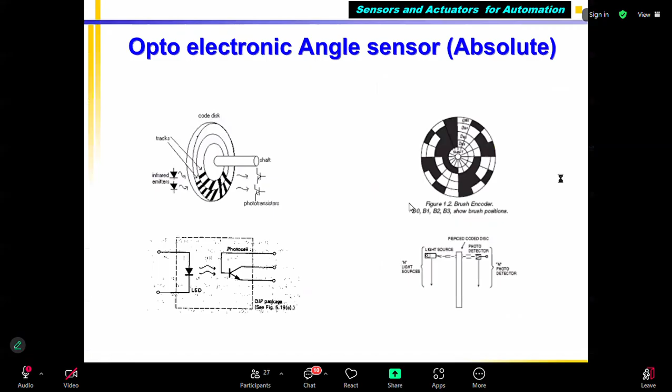Sir, I'm sorry for interrupting before the match. Sir, there was an image of optoelectronic sensor. Can you just go there? Sir, I was of the opinion that for wheel speed sensors, we use optoelectric sensors, because that's what my peers or mentors had told me in company. But we also discussed other kinds of sensors in the class, right? Like capacitive rotational sensors or something.

Inductive, I told, inductive. Yeah, inductive. So among them, which is better, sir? Optoelectric or inductive? See, optoelectric is better, but only thing is dust problem. Today you listen to it, then you'll understand.

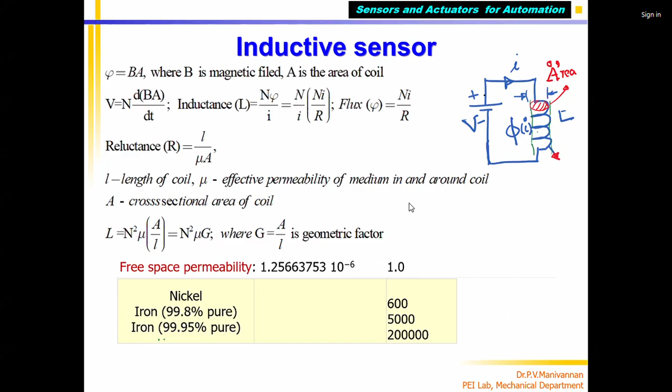So today we'll go to some more important sensor parameters in graphical form. Already we talked about sensors, correct? We started with input range, output range, sensitivity. We have talked about sensitivity, then resolution.

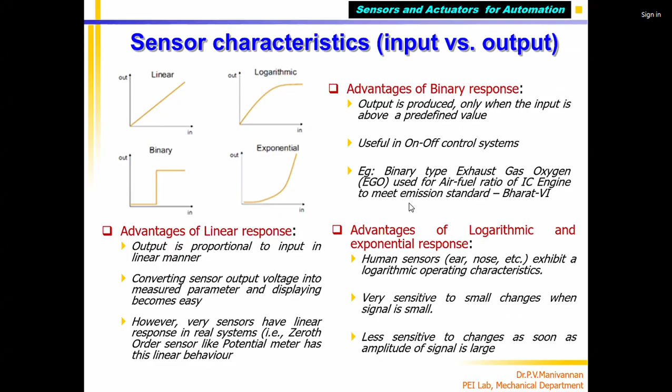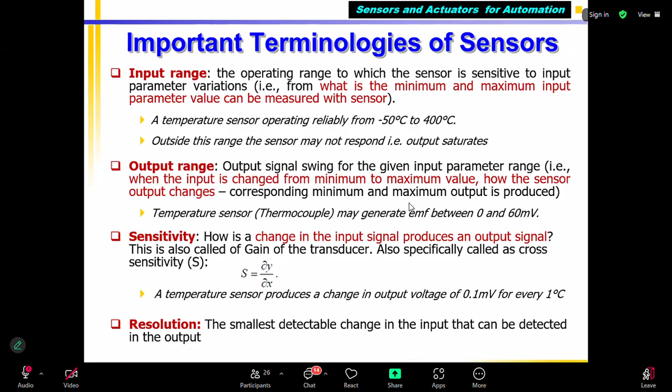So resolution, precision and hysteresis, all these things I am showing in a graphical form to understand better. So if sensor is linear, input-output characteristics: you can see the x-axis input varies from 0 to some value. Maybe pressure, temperature, force, whatever the input parameter. The sensor produces an output, generally in the order of millivolts. Most sensors produce a voltage. Few sensors produce a charge, like the piezoelectric sensor we are going to see.

Few sensors produce current also, in the order of milliamps, 0 to 10 milliamps, 0 to 20 milliamps. But many sensors produce electrical voltage in terms of 0 to 100 millivolts, 0 to 50 millivolts, or 0 to 1000 microvolts. If the input varies from 0 to some maximum value, output also starts from 0 to the output maximum value. As I change the input, the appropriate output comes. Connecting those, I get a straight line with a slope, a linear sensor, that is best.

But sometimes I told you there can be an offset. We talked about a sensor with offset. Normally it is supposed to be like this red line, a normal sensor when the sensor is new. But if you have overloaded your sensor or it is aging, even when input is 0, you can see that there is some output.

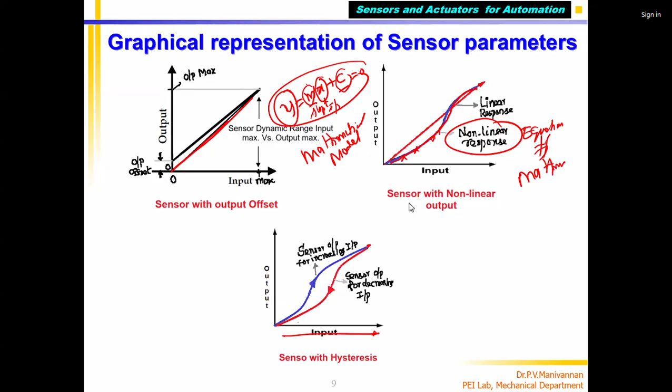Further, what do you need? This mathematical equation of the sensor. It can be a straight line equation, a spline equation, a semicircle equation, or different ones. That is called the mathematical model. And the sensor model can be a simple algebraic equation. So I said y equals mx plus c. If the equation of your sensor has only addition, subtraction, multiplication, division, then that equation is called an algebraic equation.

Sometimes you may get an equation something like dy by dt equal to dx by dt plus kx(t), something is there, correct? x is the input, y is the output, and k is the constant, and x of t is the input, correct? So what is this equation? This is a first order equation, first order differential equation.

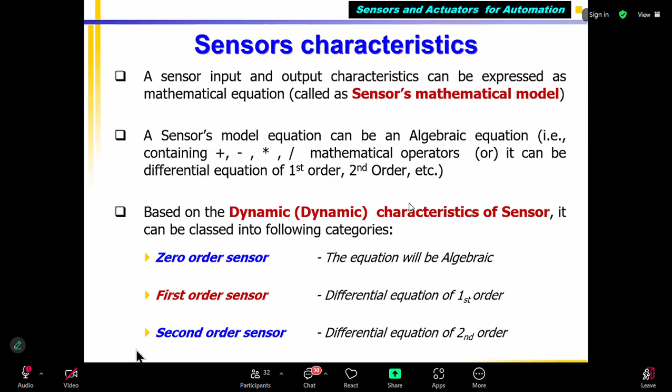Sometimes you may have d square x(t) divided by dt square plus dx by dt plus kx(t) equal to 0. You may get an equation. So this equation is called second order differential equation. So if you model your sensor, you may get a simple algebraic equation, or it can be first order, second order, third order, like that. The equation can be like that.

Already we saw modeling RLC circuit, correct? We had a spring mass damper system. We saw hydraulic actuators. Modeling already saw. So same way, sensor also will get a differential equation or algebraic equation. If the equation what you are getting is y equal to mx plus c, this is algebraic equation. If the equation has only algebraic terms, multiplication, addition, subtraction, that sensor is called zeroth order sensor, correct?

You apply input. What you did? You applied input 0 to V in, that is maximum input, and you noted what is the output, 0 to maximum. You connected the data points, correct? This is called calibration. This calibration curve is y equal to mx plus c, a straight line. Then that sensor is considered zeroth order sensor. It is algebraic equation. Then sensor is called zeroth order sensor.

Okay. Then instead of that, same thing you did, you are getting a differential equation. dx by dt plus kx(t) equal to f of t input. Sorry, output. This is output of sensor y of t, and then x of t is the input. Then if the equation is first order differential, that sensor is called first order sensor. Similarly, if you get a second order, d square x(t) divided by dt square plus dx by dt plus kx plus something is 0, then it is called a second order sensor.

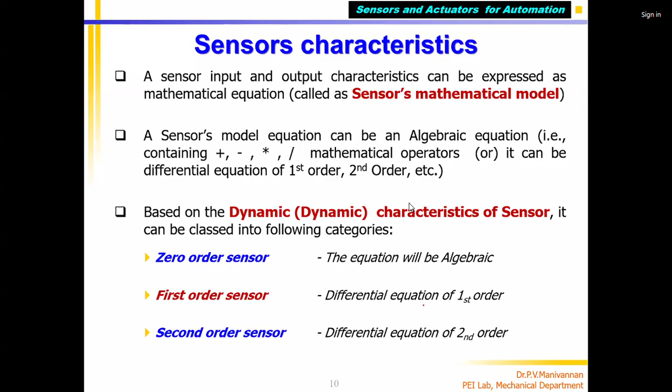Sir, it's a first order. Resistance. Is strain gauge a first order sensor? Zeroth order? Yeah. Why? Because it is like a spring. Yeah. Input output relation is only algebraic equation. Right? Yes, transfer function relation. Transfer function is a simple algebraic equation, so it is called zeroth order sensor. Okay. So the first order sensor will have a first order differential equation. Now we'll see the example.

Zeroth order sensor example, for example, potentiometer. TPS sensor is nothing but a potentiometer. It has 3 terminals. You can see 1 terminal, 2 terminal, 3 terminal. So the last 2 terminals are called fixed terminals. Definitely you would have seen the potentiometer in your lab or radio, TV. So it will look like this. This is a shaft. If I rotate this shaft, correct? This is body. Inside that you have a circuit, what you call a track, something like this.

You have a non-conducting backing on which they put ground carbon particles. Ground carbon particles, they make as a paste. The paste will be coated on the semicircular face like this. Okay, and one end is this, I say terminal 1. The other one is terminal 2. The center one I call 3. And I have one moving contact touching this carbon paste. Now this is 1, this is 2, this is 3, the moving contact. Between the ends I connect a voltage, for example, 10 volts.

Okay, here I am applying 10 volts. So between the last 2 ends, 10 volts is there. Now we know that this is what we call a ground. I will take a multimeter, correct? Our voltmeter is connected like this, and the other end is connected to the moving contact. Okay, when the moving contact is here, it will show 0 volts.

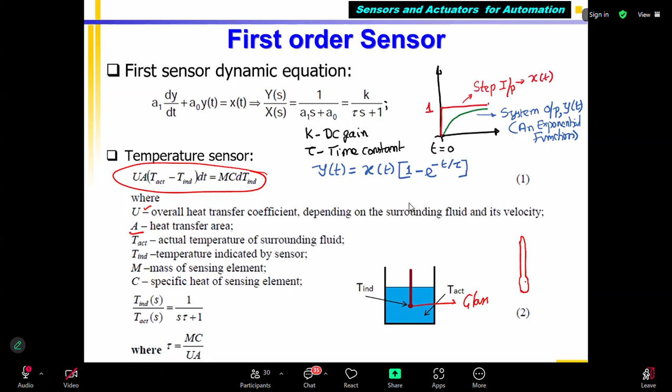The thermometer bulb: generally a mercury thermometer will be something like this, correct? Here will be the mercury. But for understanding purposes, we made it like a bulb like this, filled with mercury. Correct? Spherical.

So in that case, the surface area of this sphere is the heat transfer area, through which only heat is going inside the mercury. Mercury is receiving heat from water or wherever, whatever temperature you want to measure. Then T indicated is the temperature indicated by the thermometer. T actual is the water temperature indicated.

M is called the mass of the sensing element. What is mass here? Mercury mass. Maybe a few grams, 1 gram, 2 grams, 3 grams will be the mercury inside the thermometer. That mass. C is the specific heat of the sensing element. Again, the mercury. Correct. Once you know that, then you can find out.

So I can write the transfer function of this system, which is nothing but T indicated by T actual. Output divided by input is called the transfer function. G of S is nothing but 1 divided by S tau plus 1, where tau equals this. This is called a time constant. Tau is called the time constant of the thermometer. Please note that again, the time constant depends upon M, C, U, and A.

All are the sensor, the thermometer, parameters. M is the mass of the mercury. C is the specific heat of the mercury. Right? U is the heat transfer coefficient of the glass bulb, the thermometer bulb. Then A is the area of this one. So finally, the time constant depends upon this material.

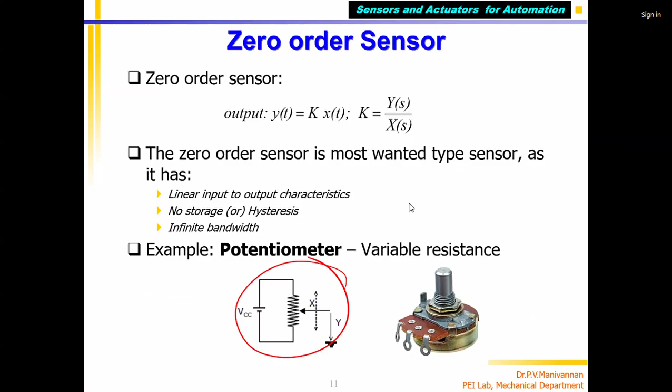Yes. For which sensor? This sensor has 0 time constant because there's no storage element. A zeroth order sensor, which has an energy dissipating element, will have a time constant equal to 0. Okay. A first order sensor has storage. That's why you are getting a differential equation. Okay. Note down this equation. This is an example of a first order sensor.

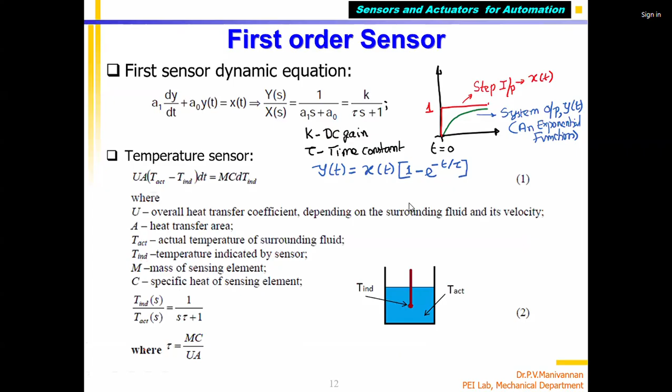KD as the damping constant of the damper, but in the majority of books we use the C or B convention. You can use anything. Nobody is going to question you. But this is convention. Don't come and say, sir, I saw some other book using some other letter. They can use whatever they wish. Okay. So this is there.

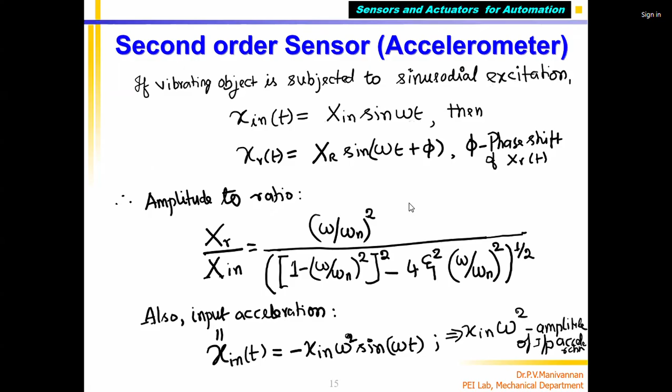Also, input acceleration: x in is a displacement. Input acceleration equals minus x in omega square sine omega t. From this you can find that when input acceleration varies, the relative displacement of the seismic mass varies. If I am able to measure that displacement using a displacement sensor, the output is proportional to input acceleration. This is a slightly bigger derivation, so if any doubt, please ask me and I can stop and explain.

Then this above equation can be rearranged. HA(omega) equals XR into omega n square divided by X in omega square, where XR is the relative displacement of the seismic mass and X in is the input displacement of the vibrating object. This equals 1 divided by the root of 1 minus omega over omega n whole square, whole square, plus 4 zeta square multiplied by omega over omega n whole square. The half means root. You can note down.

Now XR can be written as 1 divided by omega n square into HA omega into X in omega square, the relative motion of the seismic mass. The input acceleration amplitude, X in into omega square, equals XR into omega n square divided by HA, where HA omega, this whole part, is called as 1.

If it is 1, then we can say that the output xi omega square equal to omega n square XR. Both are equal. Okay. If this whole term becomes 1, when you operate your accelerometer, whose natural frequency, for example, I have my x-axis 0 to omega, and this is my omega n. X-axis is the frequency, in radians per second.

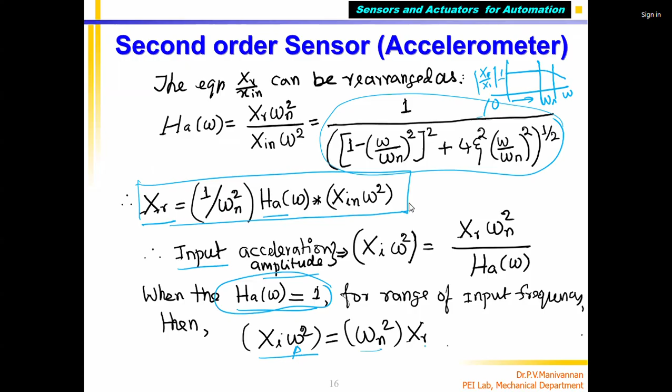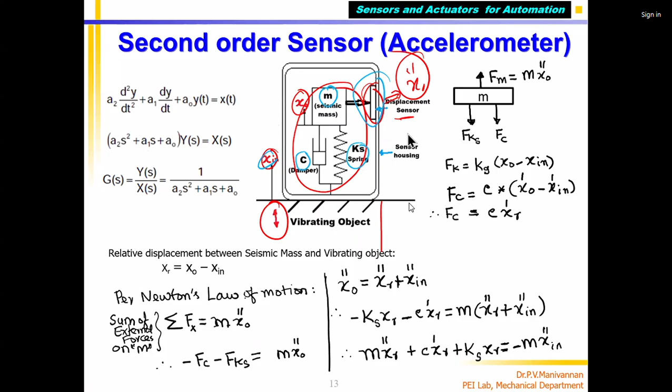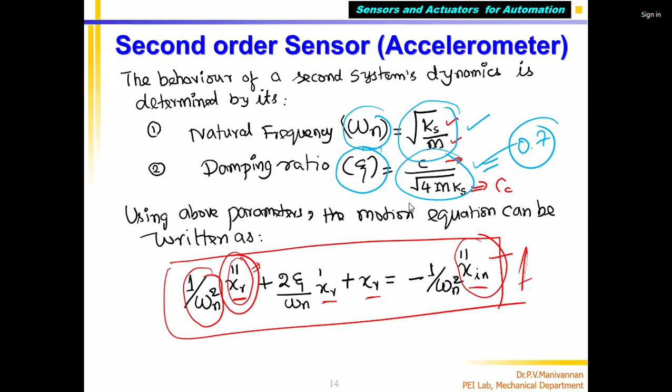So the accelerometer is designed such that zeta is around 0.707, so that I can measure up to close to 0.707 times omega n. Up to that frequency I can measure. My input frequency can vary from 0 to this much. So that is the range for which the accelerometer can be used.

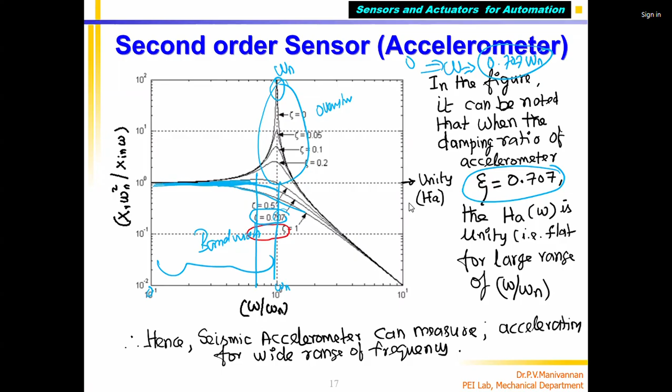Okay. Now I just complete this today. Then we can talk about other things later.

So which is better? I told you, the lesser the settling time, the better the sensor. In fact, I want the settling time to be 0. That is possible only for a 0th order system. But you cannot make an accelerometer using only an energy dissipating element.